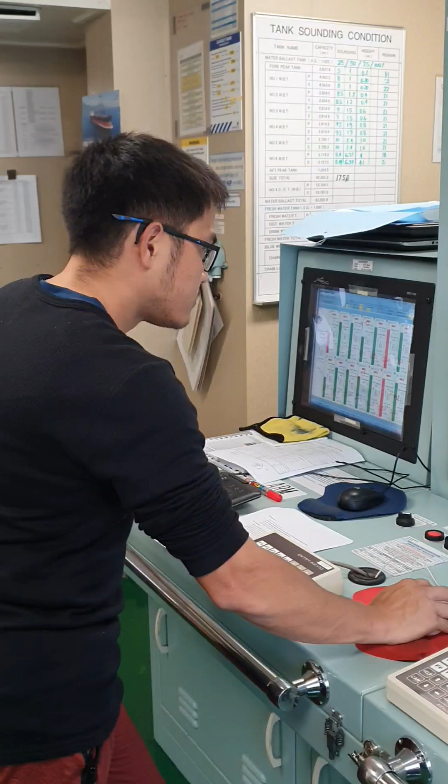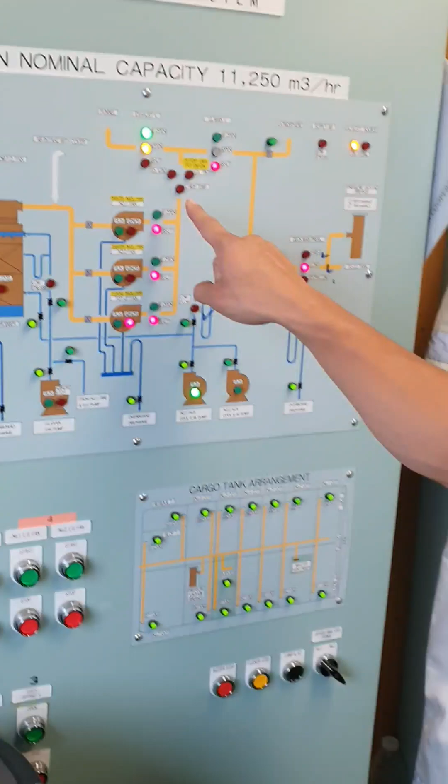Okay Chief, you can now start the discharge. Okay engine room, please set up the inert gas system. Yes, you can use the inert gas now. Use oxygen analyzer 1 and fan number 1. Yes, okay, so I'll be using the IG mode.

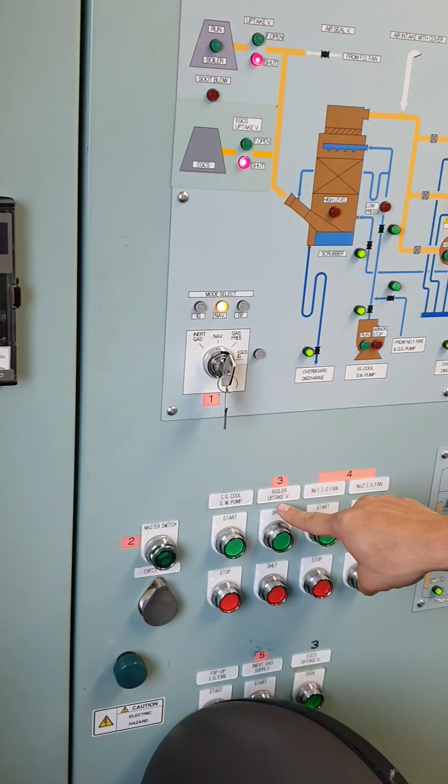Then the next step is switch on the master switch. Turn it on, very good. Then press the boiler uptake valve. Then you can also press run and print so our IG printer will run. Make sure this is set at 5.0 first, don't increase it yet so we have a margin.

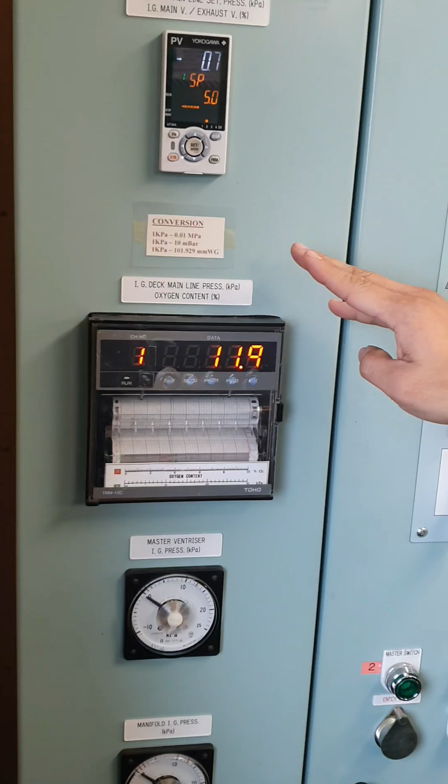Then we wait for the oxygen to go down below 5%. This is just a simulation, so it's currently at 11.9 because we're not using the IG yet. Once oxygen is below 5% and all IG branches are open, press this one, IG supply.

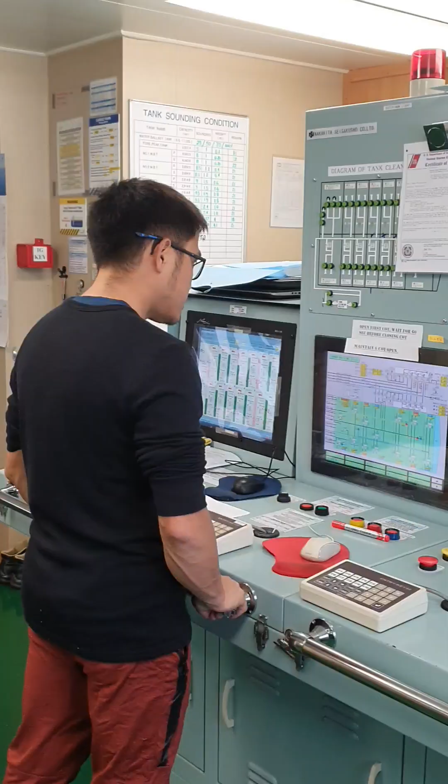So our IG is okay now. Pumpy, you can go to the pump room. Okay sir, proceeding to pump room. Okay thank you, so we just have to wait for the terminal to tell us we can start discharging. Okay Chief, you can start discharging anytime from now. Okay, I can start discharging anytime from now.

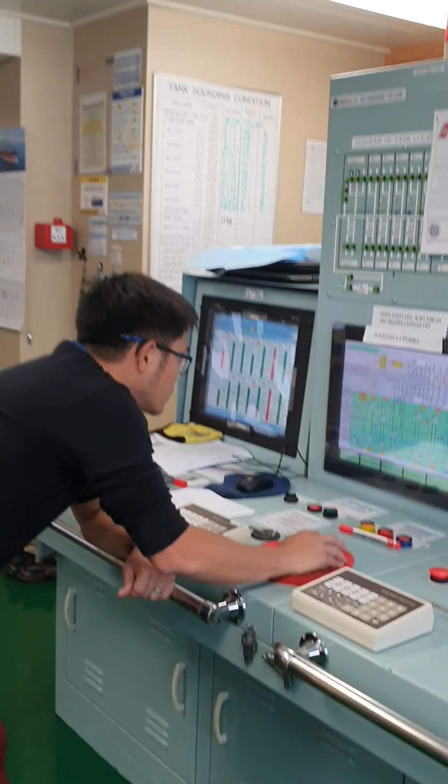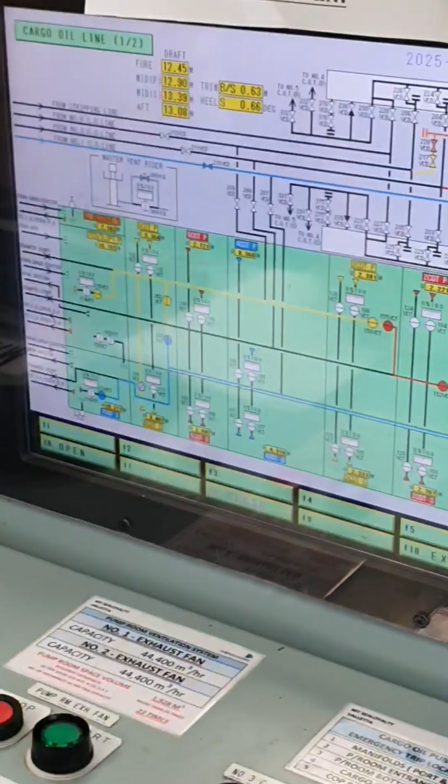So first things first, we will open the stripping valve number 4, so it will pass through the bottom line. Then open the bulkhead valve, then the suction valve. Once you open this suction valve, the separator will be filled with cargo.

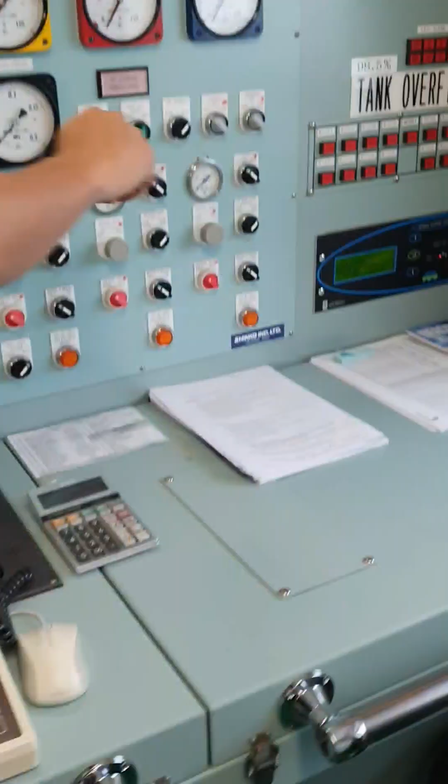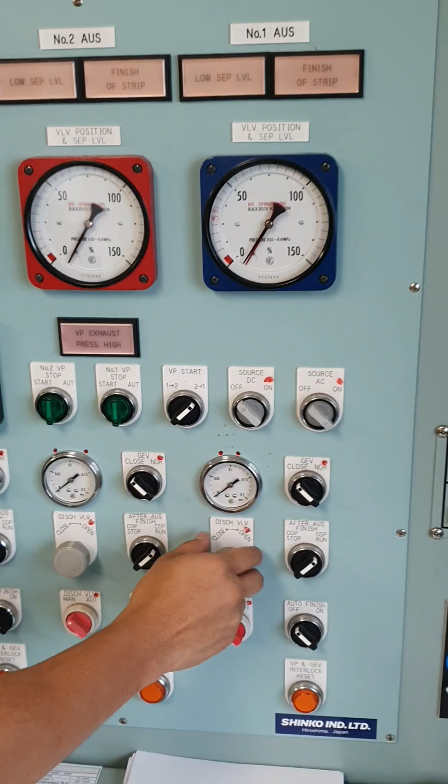On the AUS, source on, then switch to auto, then fully open. Normally you can ignore this at first because the separator is full, but if you want to be sure, you can put it in normal mode, this one, and this will stay in manual. Open this 100%, then open the discharge valve about 5 to 10% to bleed the air from the riser. After a few minutes, we can close this.

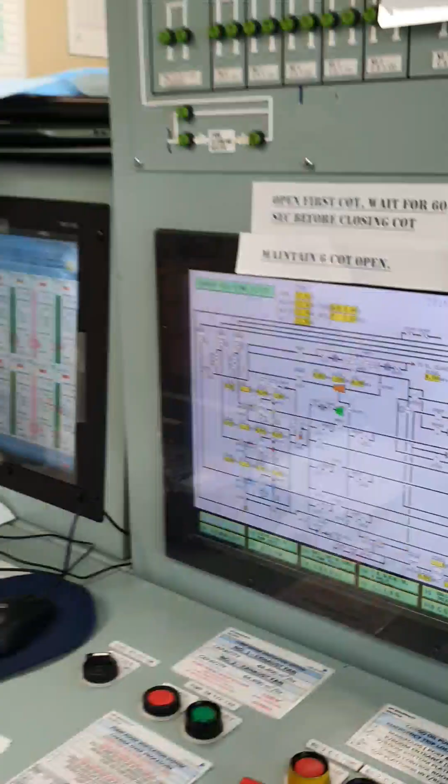Then it's ready for slow turning on cargo pump number 1. Engine room, you can start slow turning on cargo pump number 1. Okay sir, slow turning, thank you. COP 1 minimum. Okay, COP 1 minimum.

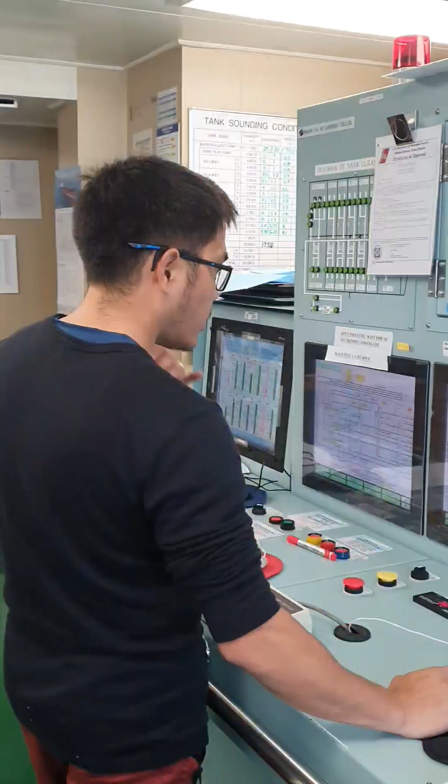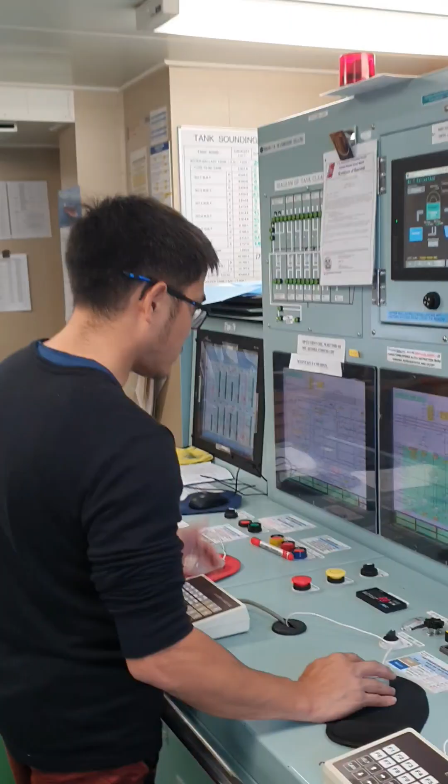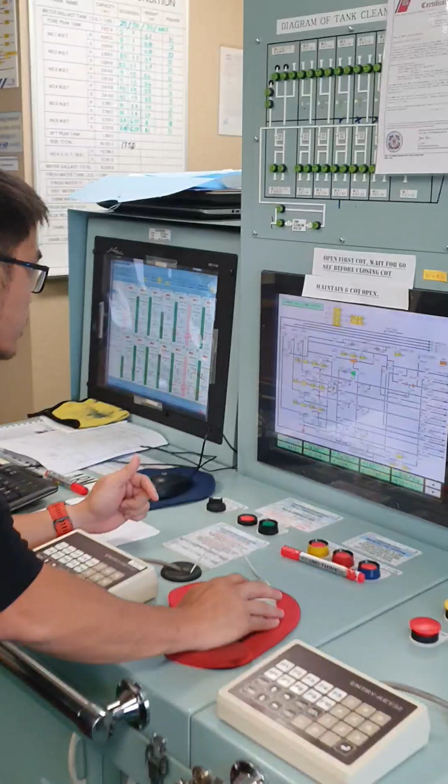In this case we will ask the deck to open the manifold, number 1, 202. Open manifold number 1. Manifold number 1 open, okay thank you. Now manifold number 1 is open. Once manifold 1 is open, we will have to easy open the discharge valve about 5 to 10% so the cargo will pass through the delivery line.

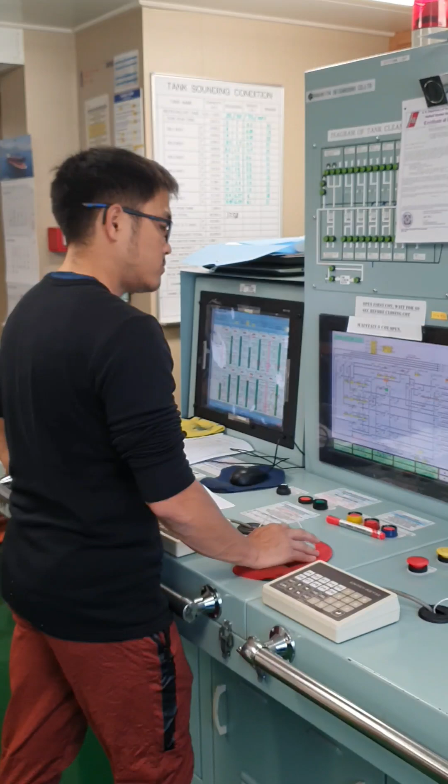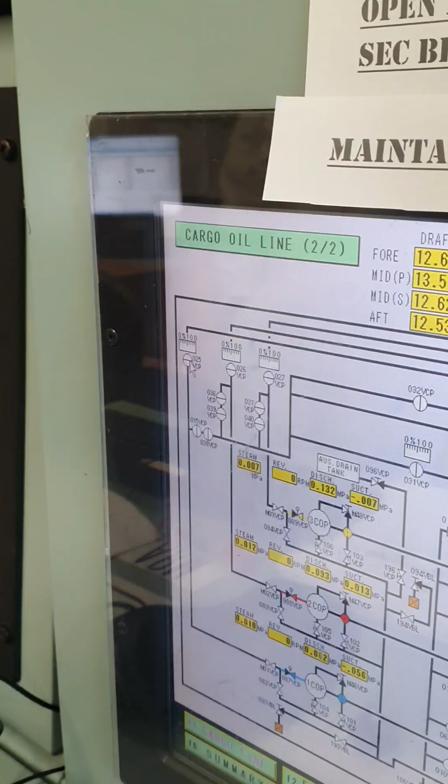Easy to fill up the line going to manifold number 1, okay so 10%. Deck advise if cargo is passing. Yes sir, cargo passing in manifold number 1. Okay, cargo passing in number 1. So I will open easy the discharge valve, number 1 up to 100%. Open. Manifold pressure 2 bars, okay manifold pressure 2 bars.

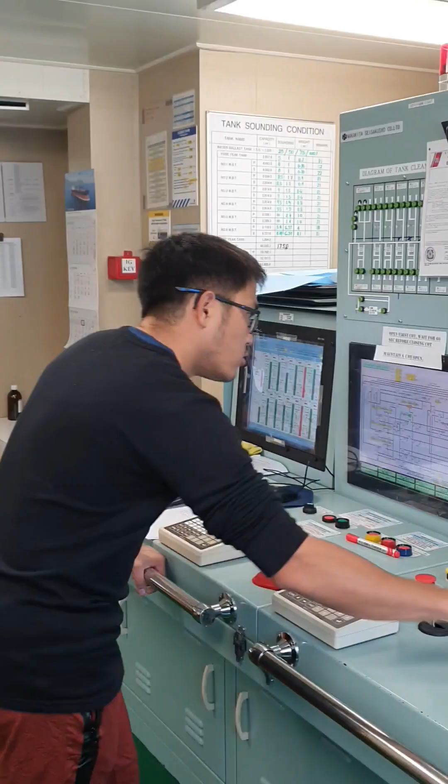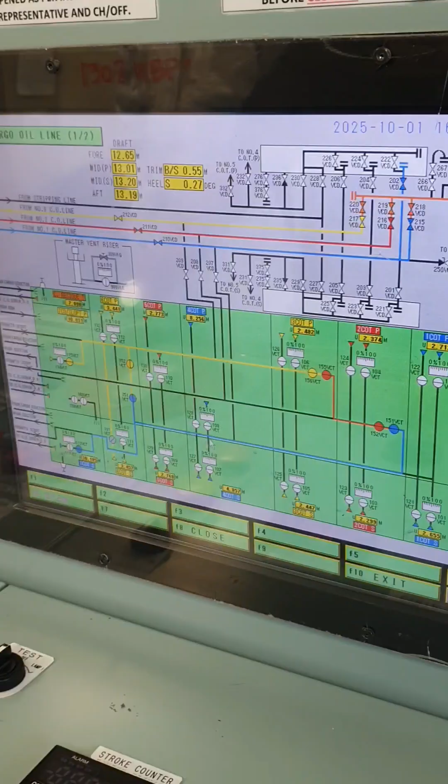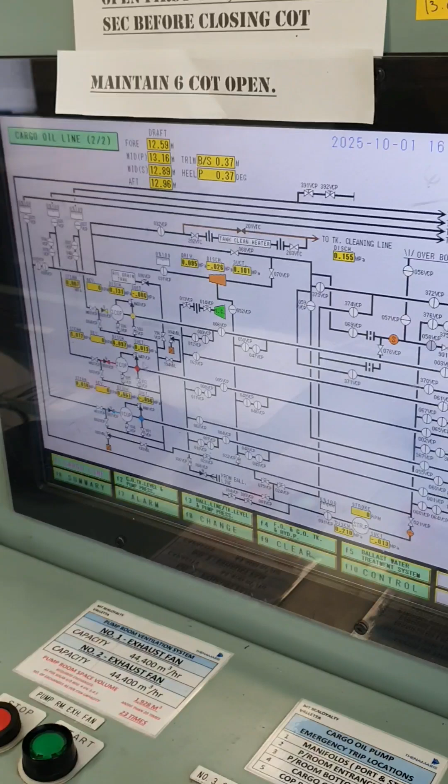So you can also set up line 2 and line 3. In doing that, make sure that you have also opened the other tank, or this wing, and make sure the forward wing is also open. Then you can open the bulkhead valve of number 2 and the suction valve of number 2, which will fill up the separator. You can also fill up line 3 by opening the bulkhead valve of number 3 and suction valve of number 3.

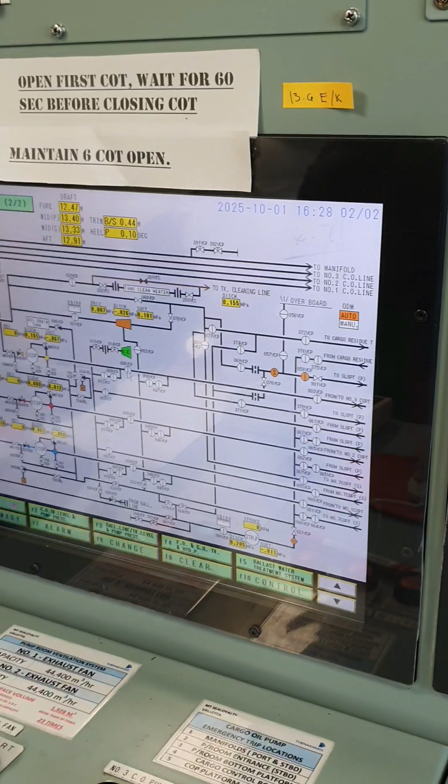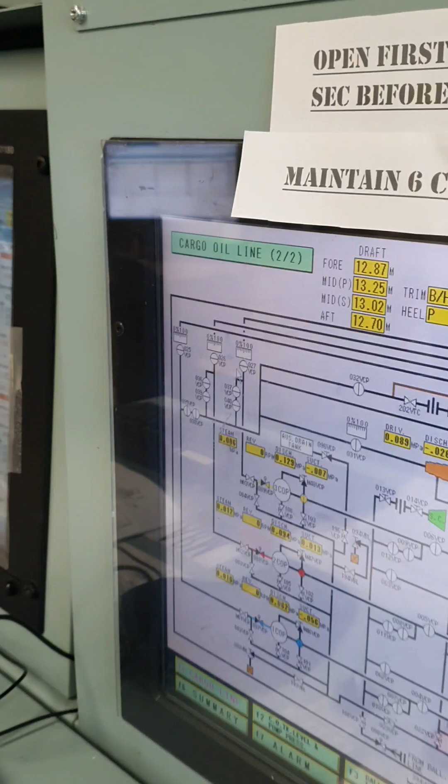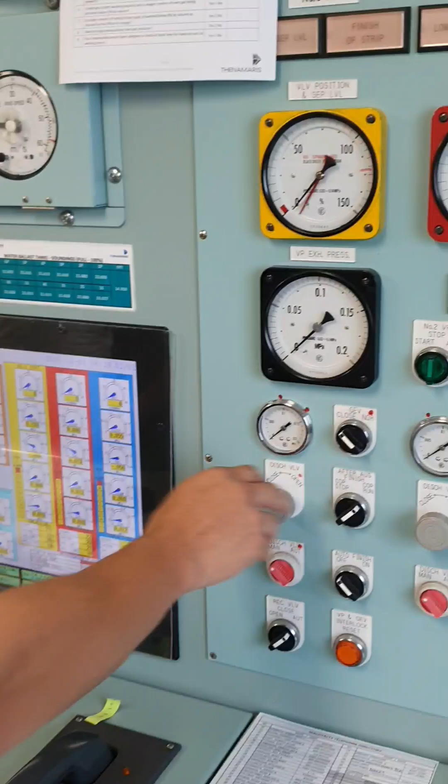Then open this 5% and then close again. Then put this to normal mode, then fully open the discharge valve of the AUS. Opening on number 2 and number 3 now. Okay, slow turning and minimum. You can now control COP number 2 and number 3, we are now on minimum.

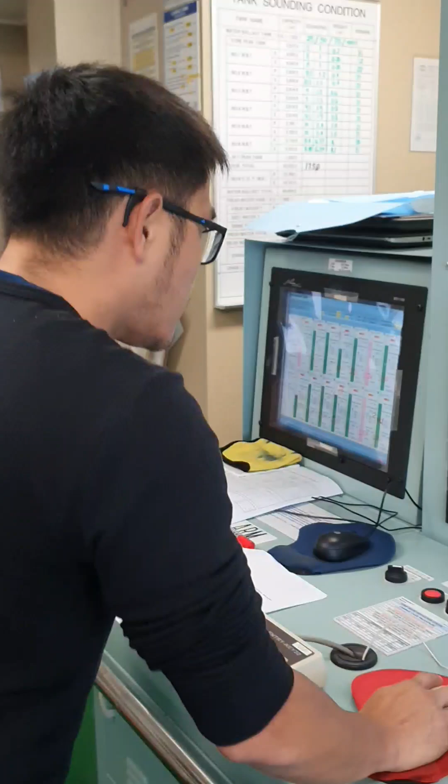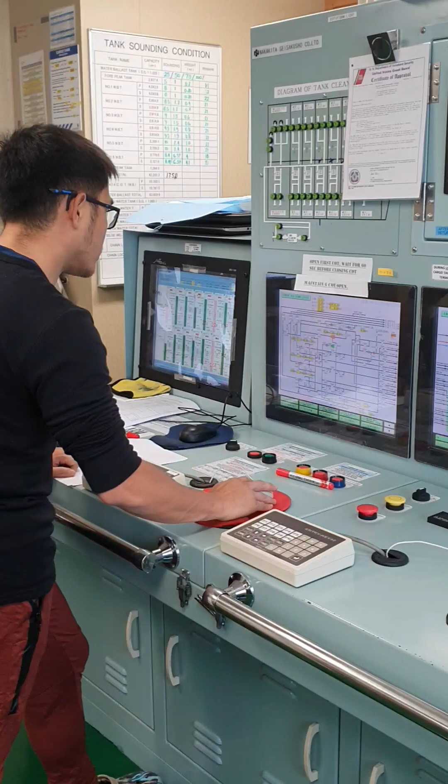Okay deck, manifold pressure? Manifold pressure 3 bars, okay, advise if there is an increase in pressure. So I will open easy the discharge valve of number 2 and number 3, one at a time. Okay pressure 4 bars, 4 bars okay.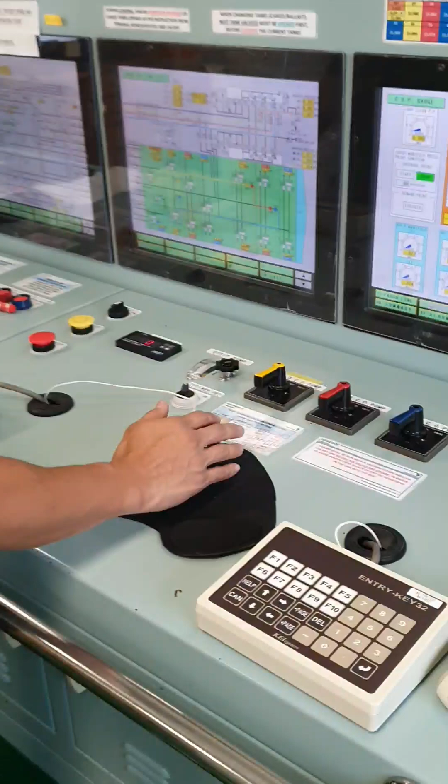So once these 3 discharge valves are fully open and these 3 cargo pumps are in minimum, we will wait for the advice of the terminal if we can increase the pressure. Yes Chief, you can increase to maximum 9 bars, okay. I can increase up to maximum 9 bars.

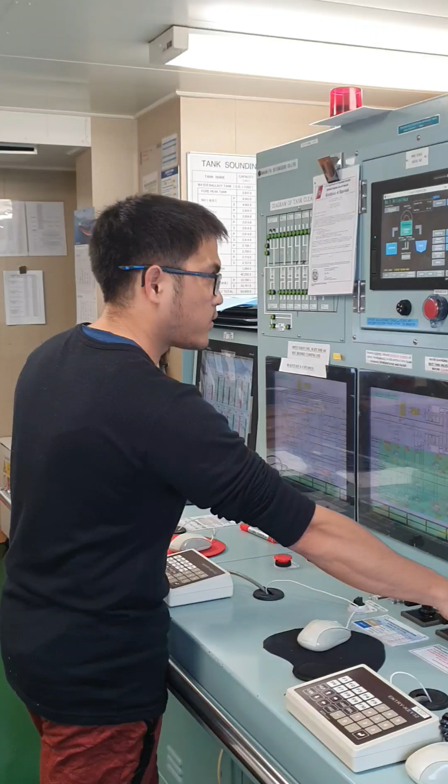So engine room, I will be increasing on 3 pumps, 1, 2, and 3 cargo pump. Okay sir, increase, okay 50-50. Increase 50-50, okay so simulating, increasing 50-50. Check all lines from forward up to aft. Forward, aft, starboard side manifold, no sign of leak, pressure 9 bars.

Okay P, everything okay in the pump room? Sir, everything okay in the pump room, no sign of leak. Thank you. So monitor if there is a reduction in the ullages.